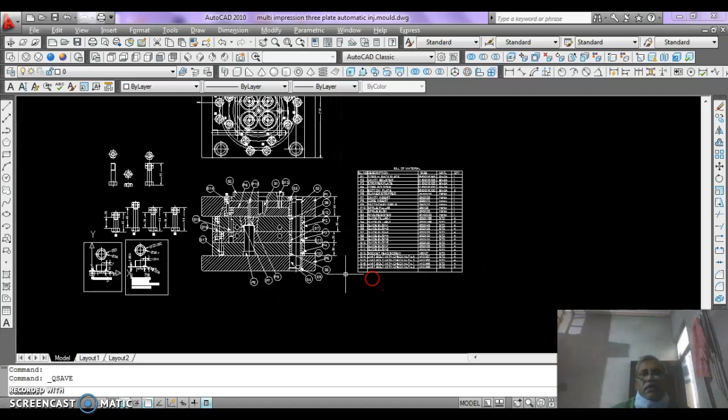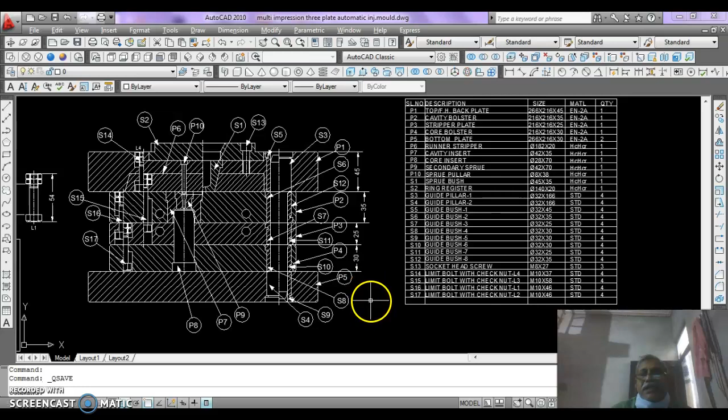Yes student, we have completed our multi-impression 3-plate automatic mold and its marking and material list. How to mark and how to prepare the material list, I just summarized because it takes more time, but the style is the same for our mold. We have already made 3 to 4 molds and their material list, so you have no difficulty to prepare the material list and marking of the parts of the injection molds.

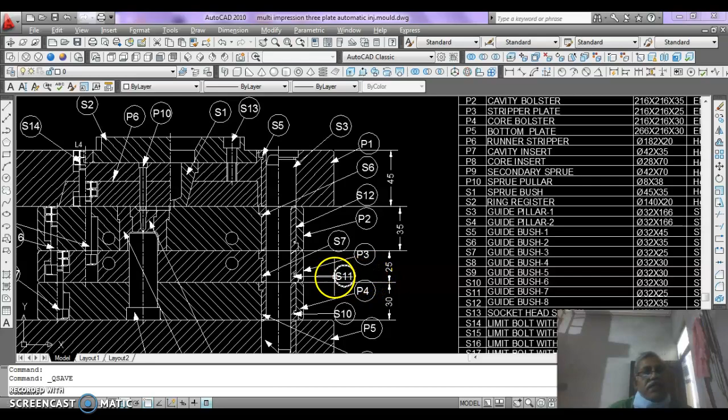So I just summarize: we prepare one bubble and mark its text in the bubble. Then we make an arrow with the help of a polyline, then prepare this pull and rotate it in its direction required by us, then pick where our component appears, and rotate it, keeping it in such a position that anyone reading our mold or working on it practically in the workshop can see and recognize it.

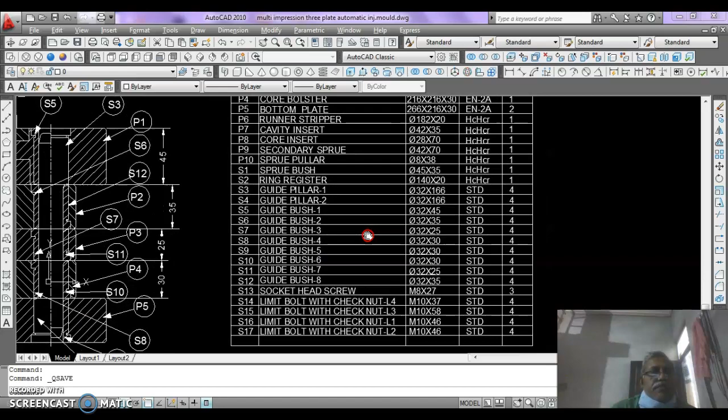And the material list, the style of material list is the same as we had in the last 3 activities, so I need not spend much time on it.

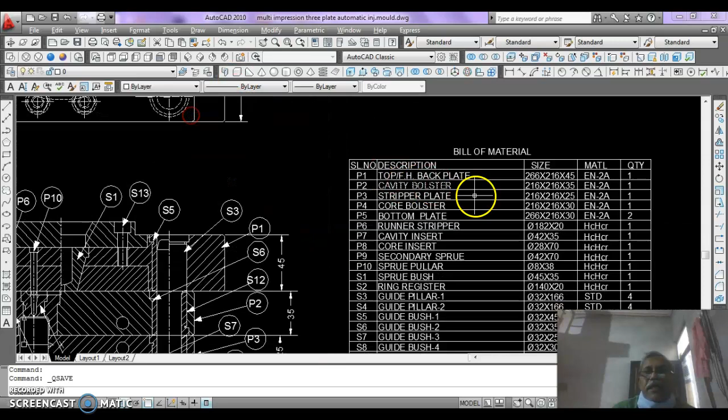So we just pick P1 for top plate, P2 for bolster plate, and check the size here in the top view. We can note that the top plate is extended 25 mm per side for the clamping in the machine, so it is 50 mm larger in the X direction than the core and cavity plates.

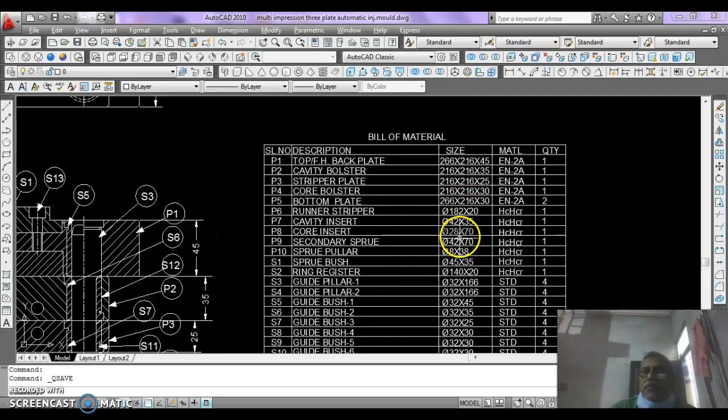The other plates, like core, cavity, stripper, are the same size, and the runner stripper is inside the top plate mold so that it aligns with the mold. So the size of the runner stripper is smaller and round.

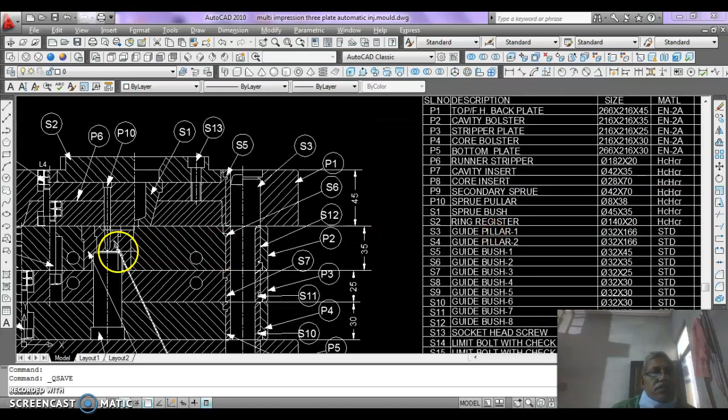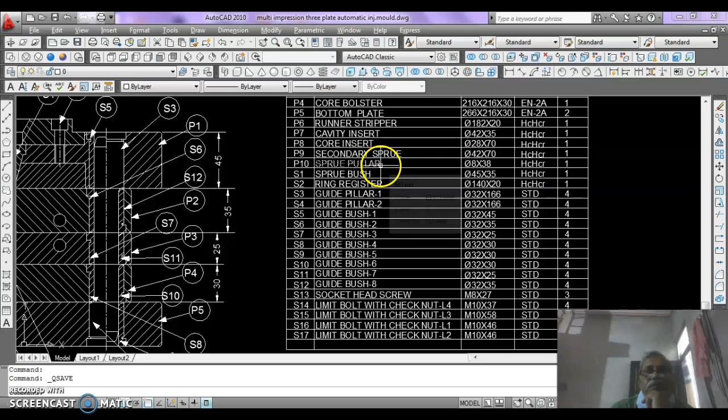There is the cavity insert, secondary sprue puller, which appears here, and their marking is 9. We mark P9 here for the secondary sprue. It is round, so we mark the diameter and height or thickness of the sprue, secondary sprue. So is it just like that? The sprue puller is of size diameter 8, and the length of the sprue puller is 38.

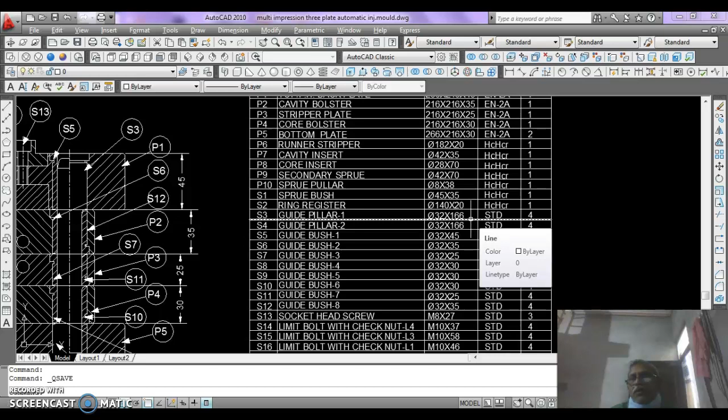Material used is as required by the company or the life of the mold required, so the material varies as per our requirement.

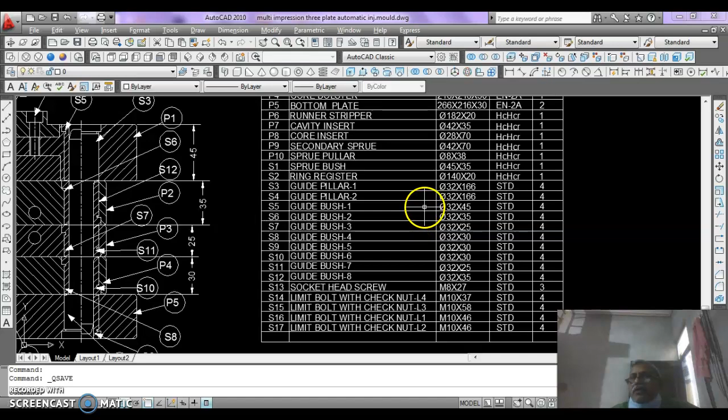The guide pillar and guide bush material is standard, it is EN31 or simple EN2A and heat treated. The guide bush - there are many guide bushes because it has 2 openings, so every plate has its individual bushes, so the guide bushes are more. So all the guide bushes you can recognize here.

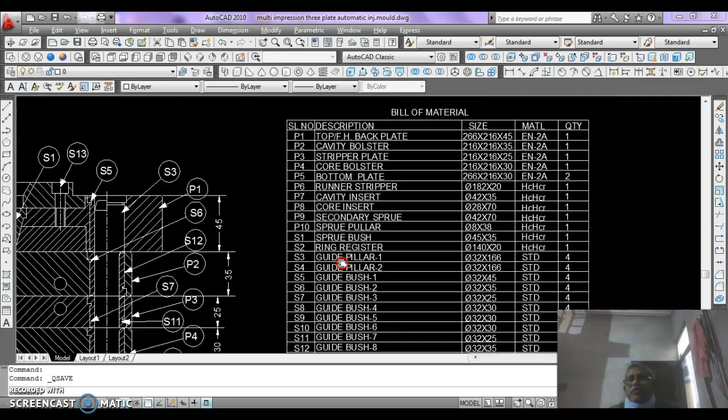And you can change the older list - just copy that older list and paste here, then modify it by clicking double and changing its number which appears there, and the part name what we mark here, and then its size you can change with the help of double clicking on any text.